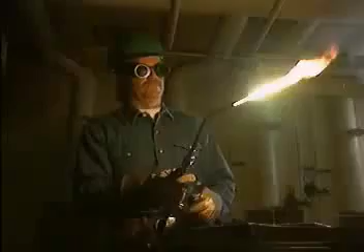Welding is a familiar industrial operation that may involve various types of equipment. Some welding applications use electric arc or resistance welding equipment to generate the high heat necessary to fuse or cut metal. But this unit focuses on a different type of welding, oxy-fuel gas welding.

Oxy-fuel gas welding rigs or units are typically self-contained, so they can be used in remote locations where there is no electricity. Also, oxy-fuel gas welding rigs are generally lighter and more compact than other types of welding equipment, so they are easy to move from place to place. Operating an oxy-fuel gas welding rig is relatively simple, as long as you have a basic understanding of the components and procedures.

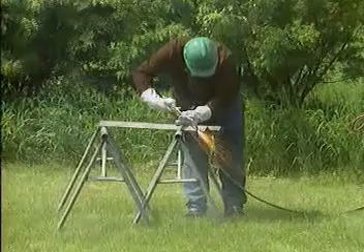Oxy-fuel gas welding is a process that mixes a fuel gas, such as acetylene, with pure oxygen to produce a flame that is used to join or cut metal. Four common applications of the oxy-fuel gas welding process are welding, brazing, soldering, and cutting.

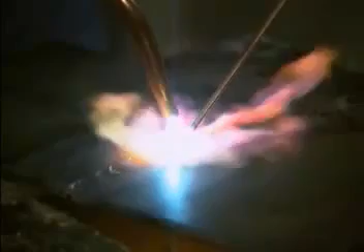Welding, the first oxy-fuel gas welding application we'll look at, is a fusion process that uses a gas flame from a torch to melt metal surfaces for the purpose of joining them. The metals fuse together as they become molten. They are strengthened at the joint by melting additional metal called filler rod or consumable rod. Because welding requires melting base metals, the torch flame temperature must reach the melting point of the metals being welded.

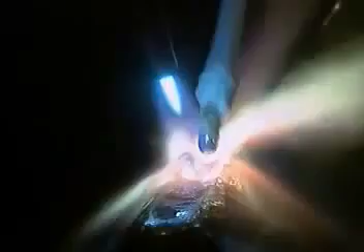Brazing is similar to welding. However, although brazing heats the metal pieces that are being joined, it doesn't melt them. The filler rod, which does melt, forms a strong bond between the base metals. The torch flame temperature for brazing operations ranges from 800 degrees Fahrenheit up to the melting point of the metals being brazed. The melting point of the filler rod must therefore be below the melting point of the base metals, but above 800 degrees Fahrenheit.

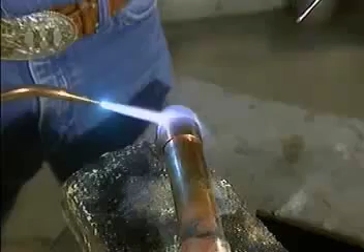Soldering is a term that's often used interchangeably with brazing. However, soldering applications are applications that use torch flame temperatures below 800 degrees Fahrenheit. This means that the melting point of the filler rod used in soldering must be below both the melting point of the base metals and below 800 degrees Fahrenheit.

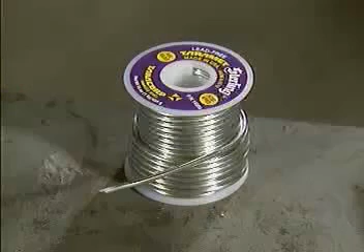Some soldering applications use specific metals as filler rods. For example, silver solder is used as the filler rod in silver soldering applications. As the solder material contacts the heated base metals, the solder melts, pours into the seam, and hardens to form a bond.

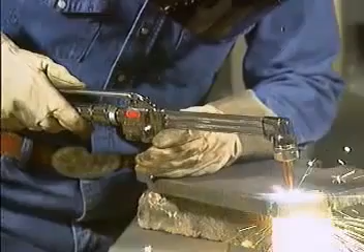The last application we'll look at is cutting. Instead of joining metal pieces together, as in welding, brazing, and soldering, cutting burns metal pieces apart. Cutting requires a different torch and tip than the other applications. Cuts are made by heating the base metal and then depressing a lever on the torch handle to release a jet of pure oxygen, called an oxygen blast. The blast causes the metal to burn or oxidize and separate.

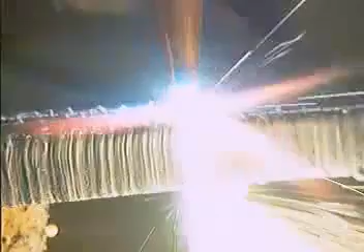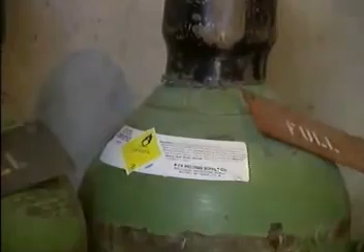Oxy-fuel gas welding burns a mixture of oxygen and a fuel gas to produce a high-temperature flame. Oxygen is a colorless, odorless, tasteless gas that readily supports combustion. It is stored in steel cylinders under pressures of more than 2,000 pounds per square inch. To minimize the chance of a fire or an explosion, oxygen should always be stored and used away from flammable materials. Oil, grease, and other petroleum products are highly combustible in the presence of oxygen. Even oil residue or a spark could trigger an explosion.

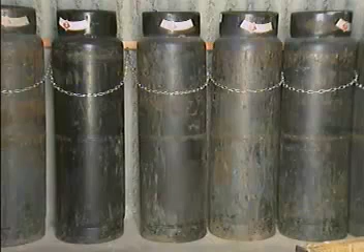Many different types of fuel gases can be combined with oxygen in oxy-fuel gas welding, but one of the most common is acetylene. We'll use acetylene for the examples in this program. Acetylene is a compound of carbon and hydrogen that has a strong garlic-like odor. In its gaseous form, acetylene is extremely unstable and it explodes easily. For this reason, it's stored in steel cylinders at pressures between 200 and 240 pounds per square inch. Storing acetylene at higher pressures causes a chemical breakdown, which produces heat and pressure that could cause an explosion.

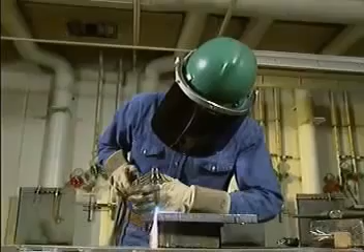Acetylene is generally the preferred combustible gas for oxy-fuel gas welding because its high flame temperature, approximately 6,000 degrees Fahrenheit, is above the melting point of all commercial metals. The high temperatures produced by combining oxygen and acetylene offer the rapid localized melting that's necessary for a variety of welding and cutting applications.

As with any industrial operation involving compressed gas or high heat, there are a number of safety concerns and precautions associated with oxy-fuel gas welding. In this part, we'll see some personal protective equipment that's commonly used for welding operations. We'll also look at ways to protect personnel in the work area and ways to prevent fires and explosions.

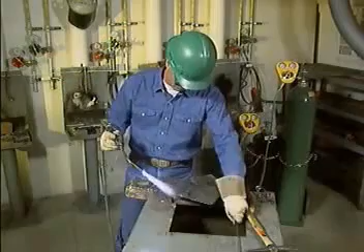Working with the extreme heat, sparks, and molten metal produced during welding operations presents potential hazards for skin, eyes, and hair. The proper personal protective equipment should be worn to avoid injury. Wear approved, snug-fitting safety goggles to protect your eyes from sparks, heat, and light. Generally, a number 5 or 6 filter lens provides an adequate shield.

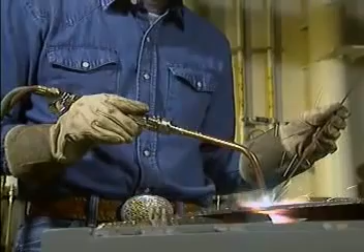Wear gauntlet-type leather welding gloves that cover your wrists and hands. Approved high-top boots with steel toes are the correct choice for footwear. Make sure that they are leather and that they fit tightly around the ankles so sparks can't become trapped inside. Wear long pants without cuffs, since cuffs can catch sparks. A long-sleeve shirt buttoned at the cuffs provides coverage for your arms and torso.

Clothing made from approved flame-retardant materials and natural fabrics such as cotton or wool provides the greatest protection from sparks and flames. Wear a hard hat to protect your hair and scalp from sparks and molten metal, particularly if you're performing overhead work. When you're performing cutting operations or working in confined spaces, a face shield should be added to your personal protective equipment.

To protect personnel working around a welding operation, it's good practice to give advance notice of when and where welding will be taking place. It may also be necessary to erect temporary barricades or shields.

Welding operations produce fumes that can cause physical effects, ranging from nausea to serious lung damage if they are inhaled. To protect personnel from the harmful effects of fumes, a well-ventilated work area is critical. A good ventilating system is needed to circulate the air and vent fumes away from the work area to the outside if possible.

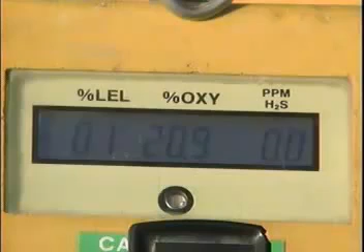It's also a good idea to test the air for the presence of flammable vapors. Check the safety and welding procedures at your plant for information on what tests are required, how they are conducted, and what to do if flammable vapors are detected. Additionally, some jobs require obtaining a hot work permit as a precaution against fires and explosions. Check with a supervisor to find out which jobs your facility requires a hot work permit for.

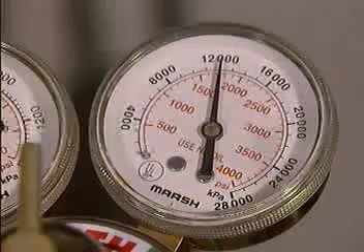When you're welding, always keep the flame clear of other equipment in the area. When you're cutting materials, direct molten metal away from equipment. Erect a shield or use a certified fire blanket if necessary. The oxygen and acetylene used in oxy-fuel gas welding are under extreme pressure. If they are mishandled, explosions could result.

Keep compressed gas cylinders away from open flames when you're working with them. Store cylinders upright, secure them, and keep them away from heat sources. Heat increases the pressure in a cylinder by expanding the gas inside. The safety plugs on cylinders can soften and burst in extreme heat, allowing gas to escape. Worse, a heat-related rupture could detonate the cylinder like a bomb.

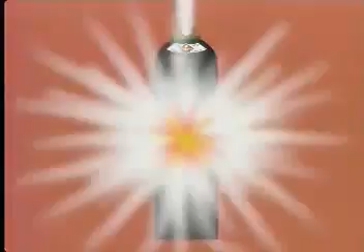Be sure to handle any compressed gas cylinder carefully. If a valve breaks off or its wall ruptures, the cylinder could launch like a rocket. Cylinders must be inspected and tested every 5 years to ensure that they remain in compliance with Department of Transportation safety standards and regulations.

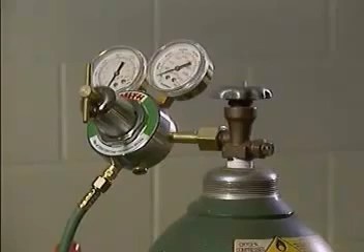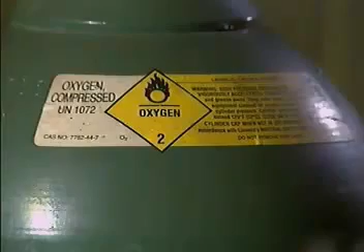To avoid the chance of workers confusing oxygen and acetylene with each other, manufacturers typically mark cylinders for easy identification. Color codes are often used. For example, this green cylinder contains oxygen, and this black cylinder contains acetylene. However, no universal standard exists for color coding, so compressed gas cylinders are also labeled. Always check the label to determine what gas the cylinder contains.

In this topic, we examined 4 common oxy-fuel gas welding applications. We looked at characteristics of oxygen and acetylene, and we examined general safety concerns and precautions associated with oxy-fuel gas welding. Now is a good time to try some practice questions.

In this part, we'll look at a main component of oxy-fuel gas welding rigs, the compressed gas cylinders. These cylinders, which are typically made of steel, are used to store oxygen and acetylene.

Oxygen, which is stable in gaseous form, is stored in hollow cylinders or bottles at pressures over 2,000 pounds per square inch, or psi. Cylinders containing oxygen range in size from 40 cubic feet to 300 cubic feet.

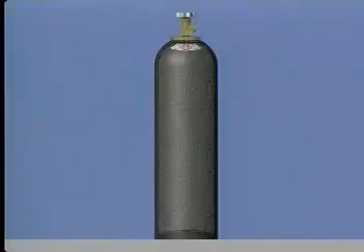Acetylene cylinders differ from oxygen cylinders in some ways. As a gas, acetylene is unstable and it could explode. For this reason, acetylene is stored in specially constructed cylinders. These cylinders are lined with a porous material that is soaked with liquid acetone to absorb some of the acetylene and help to make it more stable.

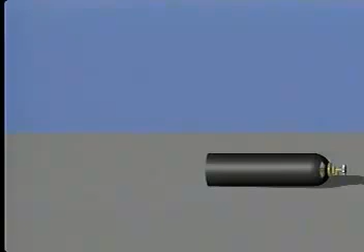To keep the liquid acetone from flowing into and clogging valves, it's important to keep acetylene cylinders in an upright position. If an acetylene cylinder tips over, set it upright and let it stand for a specified period of time, typically 30 minutes, before using it. This will drain the liquid acetone out of the valves and clear them for use.

Both acetylene cylinders and oxygen cylinders should be chained in an upright position during use or storage and when they are being transported on a handcart. This prevents the cylinders from falling over and being damaged. Cylinders may be color-coded, like this one, and they are always labeled with the name of the gas.

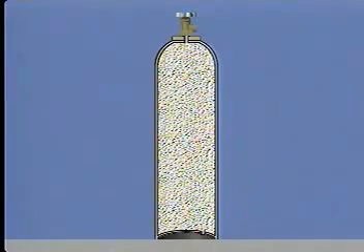For both oxygen and acetylene cylinders, a valve at the top of the cylinder is used to control the gas flow. The valve on this oxygen cylinder has a safety relief device that allows for emergency release of oxygen if the pressure inside the cylinder gets too high. Acetylene cylinders have 2 or more safety fuse plugs, which are generally located at the cylinder's top and bottom. If a fire occurs, the safety fuse plugs release the gas to prevent an explosion.

Always handle compressed gas cylinders carefully. Because they are under high pressure, don't jostle them or expose them to extreme heat. Oxygen and acetylene cylinders should be kept secured and upright in separate storage areas. Storing them together, even when they're empty, could cause a fire or an explosion.

For example, if gas escapes from a broken or leaking valve on an acetylene cylinder stored near an oxygen cylinder and ignites, it will cause the gas in the oxygen cylinder to expand. Eventually, the safety relief device will open and release the oxygen into the air. There it will be combined with the escaped acetylene to create a highly explosive mixture.

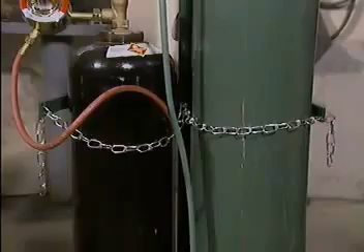The oxygen and acetylene used in oxy-fuel gas welding are contained in cylinders. Valves on the cylinders are opened to release the gases. Attached to each of these valves is a device called a regulator. The regulator reduces the high cylinder pressure to the lower working pressure that's required for welding applications. The regulator can also be set to maintain a steady flow of gas from the cylinder.

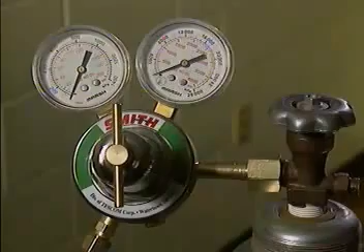This pressure adjusting screw is what controls the gas pressure. A clockwise turn increases the flow of gas, while a counterclockwise turn reduces or stops the flow. A compressed gas cylinder regulator has 2 gauges, a high pressure gauge that indicates the storage pressure inside the cylinder, and a low pressure gauge that indicates the working pressure of the gas.

An oxygen regulator's high pressure gauge typically shows pressures up to 4,000 psi. A second scale on the high pressure gauge gives a metric measurement of pressure in kilopascals or kPa. This oxygen regulator's low pressure gauge shows pressures up to 200 psi.

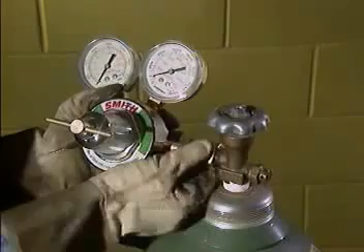Oxygen regulators, which are often color-coded green, have right-hand threads on the connections that attach to valves and hoses. To install regulators with right-hand thread connections, turn them to the right. To remove them, turn them to the left.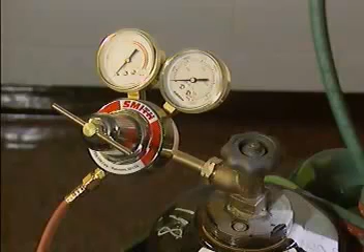Acetylene regulators, which are often color-coded red, have left-hand threads on all connections. A V-notch is cut into the connector nut as a reminder of the left-hand threads. To install regulators with left-hand thread connections, turn them to the left. To remove them, turn them to the right.

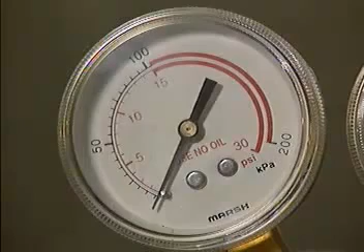An acetylene regulator's high pressure gauge generally shows pressures up to 400 psi. This acetylene regulator's low pressure gauge shows pressures up to 30 psi, but it is redlined at 15 psi, which is the value that acetylene pressure should not exceed. There is a second metric scale on this acetylene regulator's low pressure gauge as well.

In terms of operation, there are two basic types of compressed gas cylinder regulators: single stage, which reduces cylinder pressure in one step, and two stage, which reduces cylinder pressure in two steps. A single stage regulator is unable to compensate for the decrease in internal pressure as gas is drawn from the cylinder. When you use this type of regulator, you'll have to periodically regulate the output pressure with the pressure adjusting screw as the cylinder's gas is consumed.

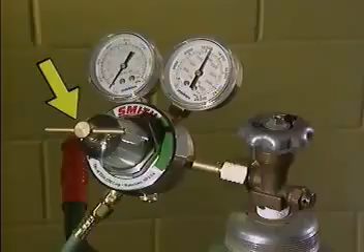With a two-stage regulator, the first step is to reduce the pressure from the cylinder to a predetermined transitional pressure by opening the valve until the desired pressure is reached. The second step is to adjust the transitional pressure using the pressure adjusting screw. Then, the two-stage regulator can deliver gas at a constant pressure as the gas in the cylinder is being consumed.

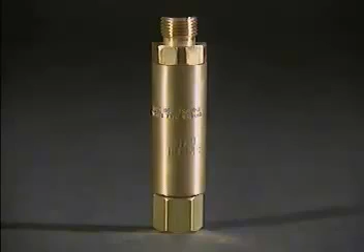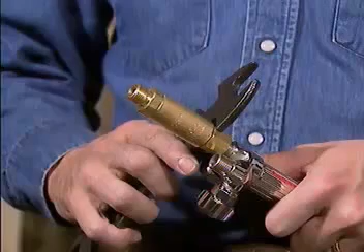A flashback arrestor contains a flame-resistant filter that stops the flame from burning back into the regulator. The flame-resistant filter allows gas, but not flames, to pass through. Flashback arrestors and check valves can be attached to the torch handle connection, or to the outlet of the regulator, or they can be attached to both. Flashback arrestors have arrows on them that indicate the direction of the gas flow. When you install flashback arrestors on cylinders, be sure that the arrows match the gas flow direction.

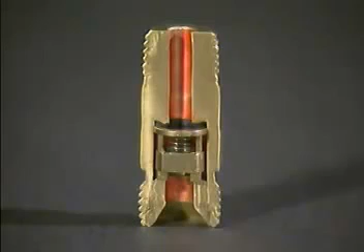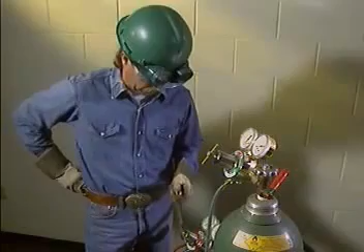The check valve allows gas to move in one direction. If the gas tries to flow in the opposite direction, the valve closes to prevent the gas from flowing back into the cylinder. Check valves should be tested occasionally by attaching them to the oxygen hose and opening the cylinder valve to make sure that gas flows in the correct direction. Check valves have arrows on them that indicate the direction of the gas flow. When you install check valves on cylinders, be sure that the arrow matches the gas flow direction.

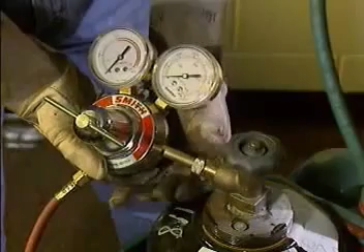Regulators are fragile and can be damaged easily. To prevent damage, be sure to follow these basic guidelines when you're handling regulators. Don't jar or shake the regulator. Install the correct regulator on the correct cylinder. Oxygen connections thread to the right, and acetylene connections thread to the left. Reversing the installation of oxygen and acetylene regulators could strip the threads. Use a cylinder wrench to install and remove regulators. The wrong wrench won't provide the proper leverage, and it could slip and damage the connector nut.

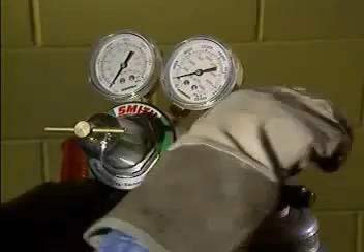Release the adjusting screw before turning the cylinder valve on and when welding operations are completed. This prevents damage to the regulator when the cylinder valve is opened and high-pressure gas is released. Never lubricate or calibrate regulators yourself. Likewise, do not attempt to repair a broken regulator yourself. Discontinue work if you think a regulator is defective and report the problem to a supervisor.

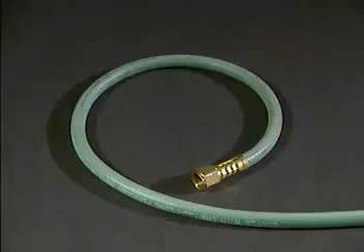The oxygen and acetylene used in oxy-fuel gas welding rigs are contained in cylinders. Valves on the cylinders are controlled by regulators and can be opened to release the gases. In this part, we'll look at different types of hoses that are used to carry gas from the regulator to the torch. We'll also look at some guidelines for handling these hoses. Typically, oxygen hoses are green with right-handed threads on their connections. Acetylene hoses are usually red with left-handed threads.

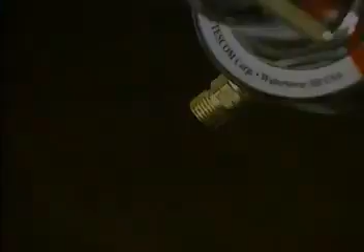To attach a hose with right-handed threads to the regulator and the torch, turn it to the right. To remove it, turn it to the left. To attach a hose with left-handed threads to the regulator and the torch, turn it to the left. To remove it, turn it to the right. Both oxygen and acetylene hoses are made from soft, flexible rubber. Without proper care, these hoses could easily be melted, cut, or tangled, or they could become brittle and crack. Pressure from the regulator to the torch can't be maintained with a damaged hose. If the gas escapes, it could create a fire hazard.

Be sure to inspect hoses for damage and wear before you use them. If you find cuts, burns, cracks, or other damage, replace the hose. To avoid overextending the hoses, place cylinders as close to the work area as possible, but be sure that they are far enough away from flames, sparks, and molten metal to avoid melting or burning a hose. Don't place a hose under metal that's being cut. Falling metal could sever the hose. Make sure there are no kinks or twists in a hose that could restrict the gas flow.

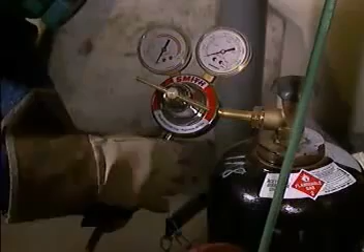When you're installing or removing a hose, use a cylinder wrench. The incorrect wrench won't provide the proper leverage, and it could slip and damage the fittings. Never lubricate hose connections. Many lubricants contain oil and grease that can ignite and explode in the presence of oxygen. Store hoses in flat coils to prevent cracks and kinks.

The oxygen and acetylene used in oxy-fuel gas welding rigs are contained in cylinders. Valves on the cylinders, controlled by regulators, open to release the gases. Hoses then carry the gases to the torch. Finally, the torch mixes the oxygen and acetylene for the flame. In this part, we'll look at welding and cutting torches and tips. Welding, brazing, and soldering applications use welding torches and tips. Cutting operations require cutting torches and tips.

There are two types of welding torches: equal pressure and injection. Equal pressure torches and injection torches differ in the way that they mix oxygen and acetylene. Equal pressure torches have a single tube or chamber inside where oxygen and acetylene are mixed. As the gases enter the torch, the amount of gas flow is controlled by valves located near the hose connections at the base of the torch handle. Oxygen and acetylene enter the chamber at equal pressures and mix together. Then the gases exit through the tip or nozzle.

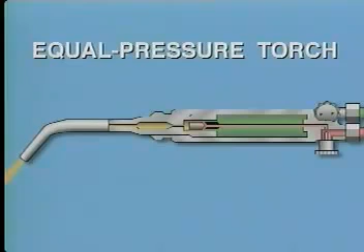Injection torches have two separate tubes inside instead of a single mixing chamber. Therefore, the gases are mixed in the tip. Oxygen enters the torch under high pressure and passes through a restriction called a venturi. This increase in velocity produced by the venturi enables the oxygen to draw the acetylene into its stream just before it enters the tip. The gases are then mixed in the tip just before they exit.

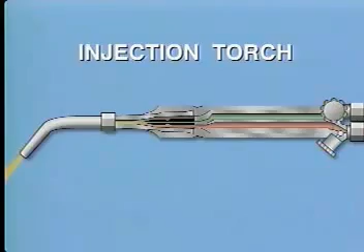There are some basic differences between welding torches and cutting torches. Welding torches have their tips set at an angle wider than 90 degrees from the handle. Generally, cutting torches have their tips set at exactly a 90-degree angle. Though cutting tips may be set at other angles, the precise 90-degree cutting tip angle is used most often because it lets the welder apply maximum heat to a specific area.

Another basic difference between the two types of torches is in the handle. A cutting torch has a flat lever on its handle, called a cutting oxygen lever. Depressing the lever releases an oxygen blast to cut metal.

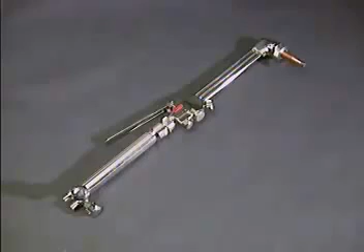There are two types of cutting torches: a one-piece cutting torch and a combination cutting torch. The one-piece cutting torch has oxygen and acetylene valves that allow the gases to enter the torch and flow into the tip to be mixed. The combination torch consists of a cutting torch attachment that screws onto a welding torch handle. The attachment has an additional oxygen valve to control the supply of gas to the flame and a cutting oxygen lever.

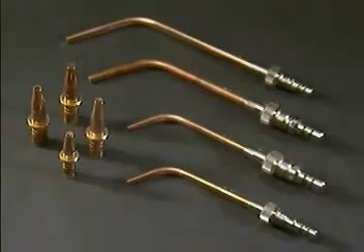Because there are many different welding and cutting jobs, there are different types of welding and cutting torch tips. Welding and cutting torch tips are generally classified by numbers relating to their thickness. There's no industry-wide standard torch tip scale, so manufacturers set up their own scales. A torch can be fitted with many different sizes of tips.

Welding tips have a single orifice or opening through which the oxygen and acetylene feed the flame. Cutting tips have 4, 6, or 8 small preheating orifices that supply gas to the flame. Cutting tips also have one large orifice through which the oxygen blast exits the torch.

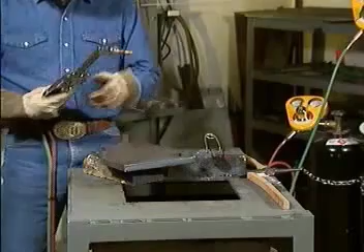Whenever you're handling or changing welding or cutting torch tips, there are some basic guidelines you should follow. Always allow tips to cool after use before you attempt to change them. Tips expand when they're hot, and the expansion locks them into place. Use tip cleaners or tip drills to clean the orifices without damaging the metal. Use fine sandpaper occasionally to remove buildup on the outside surface of the tip.

In this topic, we looked at some common parts of oxy-fuel gas welding rigs. We looked at compressed gas cylinders, regulators, hoses, and torches. We also covered some basic guidelines for handling each part. Now try some practice questions.

In this part, we'll look at how the components of an oxy-fuel gas welding rig can be assembled. The specific procedure used for assembly can vary from plant to plant. We'll look at a typical procedure, but you should check with a supervisor to see how it's done at your facility. Assembling an oxy-fuel gas welding rig can involve a number of hazards, so make sure you follow your facility's safety precautions as well.

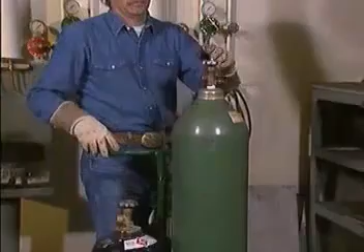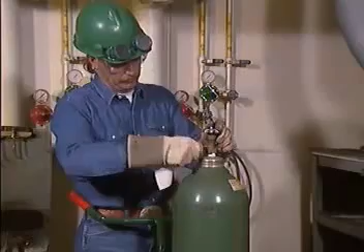To prepare for the assembly, the welder in our example first stands to the side of the cylinder valves and opens them slightly, or cracks them, to expel dirt that might be lodged in the valves. He then removes any remaining dirt by wiping out the regulator connection with a lint-free rag. Next, the welder connects the oxygen regulator to the oxygen cylinder and tightens the connection. He repeats the procedure to install the acetylene regulator on the acetylene cylinder.

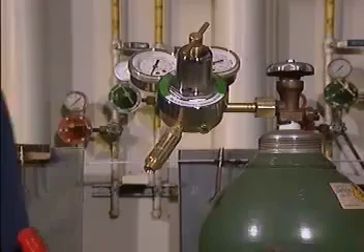After the regulators are attached, the welder installs flashback arresters with check valves inside them. In our example, he attaches the flashback arresters with check valves to the hose connections on both the oxygen and acetylene regulators. Some procedures call for installing flashback arresters and check valves on the torch handle connection in addition to or instead of the regulators. In either location, flashback arresters stop fires, and check valves allow for gas flow in only one direction.

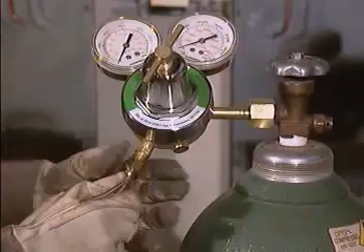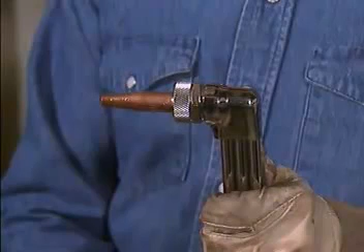The next step is to connect the hoses to the regulators. Next, the welder attaches the oxygen and acetylene hoses to their appropriate connections on the torch body. Based on the thickness of the metal he's working with, the welder selects the proper sized tip recommended by the tip manufacturer, attaches it to the end of the torch, and tightens it in place. This tip has a special soft seat design that requires hand tightening only. Other tips may require tightening with a wrench.

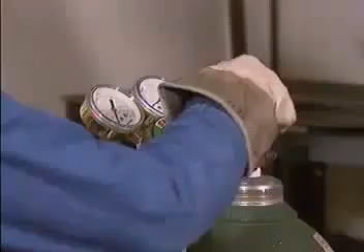When all the rig parts are assembled, there are just a few more things the welder needs to do. First, he checks to make sure that the oxygen and acetylene valves on the torch are closed to prevent the release of the gases into the work area. Then, he loosens the adjusting screws on the oxygen and acetylene regulators to prevent damaging the regulators when the cylinder valves are opened and high-pressure gases are released.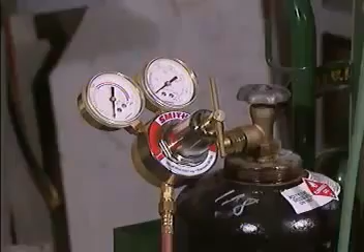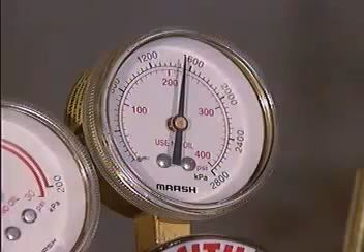Next, he slowly opens the oxygen cylinder valve all the way so that the pressure in the gauge can rise gradually. Now the welder opens the acetylene valve just a half to 3/4 of a turn. The valve must be opened at least a half turn to deliver enough acetylene to the flame. Not having enough acetylene would restrict the gas flow to the torch and tip, causing them to overheat. Opening the valve no more than 3/4 of a turn enables the welder to close the valve quickly in case of fire.

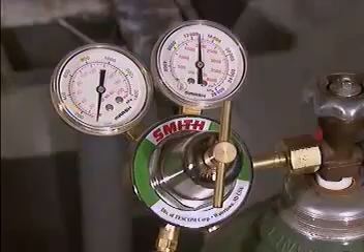After the oxygen and acetylene valves are open, the welder adjusts the working pressure. He turns the oxygen regulator adjusting screw slowly until the working pressure is set to the manufacturer's specifications for the tip that he's using. Then, he repeats the procedure with the acetylene regulator. He uses the pressure adjusting screw to set the working pressure for the acetylene.

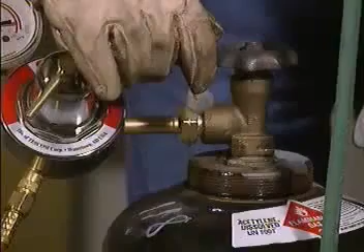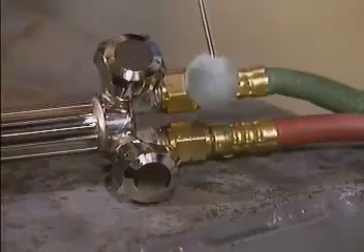Undetected gas leaks in the equipment could cause a fire or an explosion. The welder tests for leaks by brushing a non-oil-based detergent and water solution on possible leak points. He tests the oxygen cylinder valve, the acetylene cylinder valve, the oxygen regulator connection, the acetylene regulator connection, and the hose connections at the regulators and the torch. Bubbles will form like this if a leak is present.

The welder can also check for leaks by closing the oxygen and acetylene cylinder valves after the working pressure has been set for both. If no change in pressure occurs, no leaks are present. A drop in the pressure gauge readings, however, indicates a leak. If the welder detects a leak, he'll report it to a supervisor. Otherwise, he'll continue with his welding assignment. In our example, no leaks were detected, and the welder is ready to proceed.

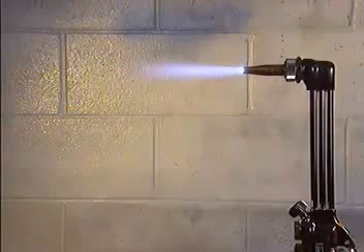A neutral flame burns equal parts of oxygen and acetylene. The inner cone of a neutral flame is light blue. It's surrounded by a darker blue outer flame envelope that results when oxygen in the air combines with the heated gases in the inner cone.

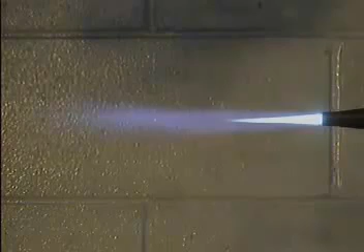A carburizing flame has a white streak or feather that is created by burning excess acetylene. The length of the feather depends on the amount of excess acetylene in the flame. A carburizing flame has a longer and brighter blue outer flame envelope than a neutral flame. A carburizing flame is cooler than a neutral flame. For this reason, it is not used for cutting applications.

The third flame type is an oxidizing flame. An oxidizing flame has an excess of oxygen. Its inner cone is shorter, bluer in color, and more pointed than the inner cone of a neutral flame. Its short outer flame envelope often fans out at the ends. An oxidizing flame is the hottest of all gas flames. However, an excess in oxygen is detrimental to welding operations. Excess oxygen can combine with the base metal to form metal oxides, which will weaken and deteriorate the joint.

For this reason, an oxidizing flame is rarely used. Lighting the torch is a fundamental part of using an oxy-fuel gas welding rig. However, there are variations in the procedures that are used, as well as a number of safety considerations to keep in mind. We'll look at a typical lighting procedure, but before you light a torch and adjust the flame, check with a supervisor to see how it's done at your facility. Be sure to follow the safety precautions for where you work as well.

In our example, the welder's rig is assembled. He's wearing the required personal protective equipment, and he's ready to light the torch. To make sure that the oxygen hose contains only oxygen and that the acetylene hose contains only acetylene, the welder purges each hose. Purging is accomplished by opening the torch's oxygen and acetylene valves one at a time for 2 to 3 seconds for each 25 feet of hose.

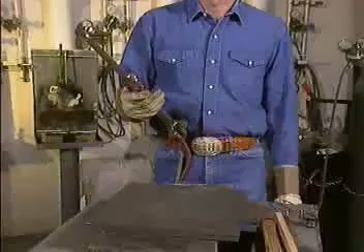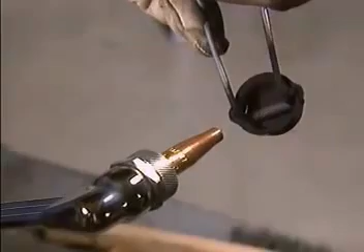Once the hoses are purged, the welder opens the acetylene valve on the torch handle a half turn. He positions a friction lighter near the front of the torch tip and lights the torch. The friction lighter, which is also called a striker or a spark lighter, works by rubbing a piece of flint against a steel surface to create sparks.

The torch is lit now, and the welder adjusts the acetylene flame by turning the acetylene valve on the torch body. He increases the acetylene until the flame stops smoking, which indicates that he has the proper mixture of oxygen and acetylene. Finally, the welder slowly turns the oxygen torch valve to open it and continues adjusting the valve until he has fine-tuned the flame to the type needed for his welding job. In this case, he needs a neutral flame to do a cutting job.

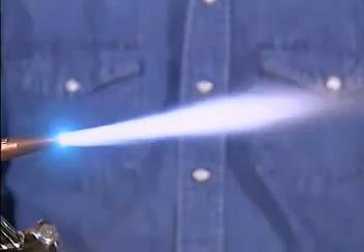In this part, we'll look at how to shut down and disassemble an oxy-fuel gas welding rig. The shutdown and disassembly procedure that we'll see may be different from the one you follow, so always check with your supervisor to make sure that you're clear on the procedure that's used at your facility. There are 2 basic steps to shutting off a torch. First, the welder in our example closes the acetylene valve on the torch body. Now he is ready for step 2, closing the torch's oxygen valve.

The next step is to close the acetylene and oxygen cylinder valves. This stops the flow of gas from the cylinders so that the parts of the rig can be safely disassembled without releasing the gases into the air. After he closes the oxygen and acetylene cylinder valves, the welder reopens the oxygen valve on the torch. This allows the excess gas to escape so that it doesn't become trapped inside the torch or the hose.

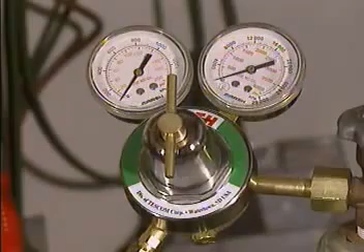He makes sure that all of the excess gas is released. Releasing all the excess gas is important because it prevents a gas release from gas trapped in the torch or the hose. Such an uncontrolled release could be explosive. If all the excess gas is released, the oxygen working pressure gauge reads 0, and he closes the torch oxygen valve. Tension on the regulator adjusting screw can damage the regulator over time. To ease the tension, the welder backs out the oxygen regulator adjusting screw until it is slack.

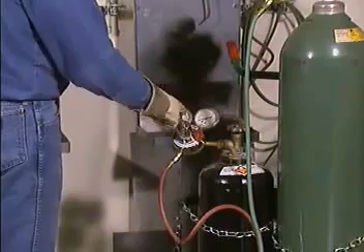Now the welder repeats the same procedure for acetylene. Your facility may shut down acetylene first, then oxygen, so check with a supervisor. However, the procedure is generally performed start to finish for one gas before it's started on the other. Both cylinder valves closed and all pressure gauges at 0 indicate that an oxy-fuel gas welding rig is shut down.

Now the welder disassembles the rig by basically reversing the assembly procedure, starting from the torch and working his way in. He removes the oxygen and acetylene hoses from the torch. He then removes both hoses from the regulators. And he removes the regulators from the cylinders. He should replace the protective caps on the cylinders next. The cylinder valves are the weakest point of the cylinder. The protective caps guard the cylinder valves against damage and breakage if the cylinder falls or is hit. Finally, the welder secures the cylinders upright and transports them to their separate storage areas.

In this topic, we examined one way to assemble an oxy-fuel gas welding rig. We looked at different types of oxy-fuel flames and how to light a torch and adjust a flame. We also looked at how to shut down and disassemble an oxy-fuel gas welding rig. Now try some practice questions on this material.